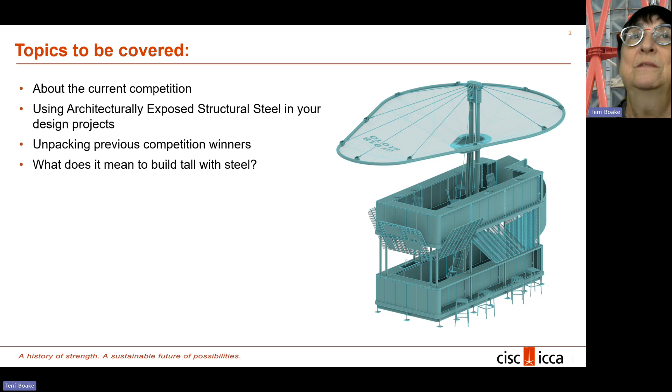The topics we'll look at today: a little bit about the current competition, using architecturally exposed structural steel in these design projects, unpacking some previous competition winners to find out how they did it and what their approach was, and lastly, what it means to build tall with steel.

The current competition is called Ascent. What we are asking you to do is apply steel to the design of an experiential project that investigates ascending—rather open, intentionally. It's to be located in Canada, at the discretion of the specific teams.

Our first prize is $8,000, with a faculty sponsor receiving $2,000. Second prize, $4,000, faculty sponsor receiving $1,000. Third prize, $2,000, faculty sponsor receiving $500. The winnings are divided amongst the team members. Submission deadline is May 16th, 2025. Full information is available on our website.

Eligibility and jury: eligibility is open to students in schools of architecture and architectural engineering across Canada in degree programs. The jury includes people from all parts of the industry—architects, engineers, fabricators, and educators. They know steel, and have been selected because of their passion and interest in steel, specifically looking at exposed structural steel. So you need to show them that you know steel too, that you're adept at designing and pushing the limits with it, and maybe even love it a little bit. Be sure not to include your names on the panels or you will be disqualified.

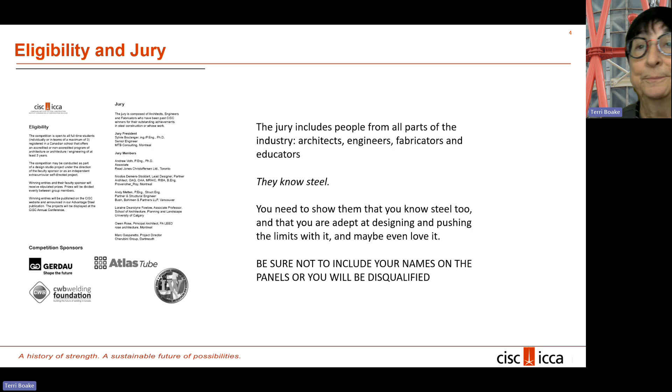A little bit about architecturally exposed structural steel. This is a steel competition, and the steel will predominantly be expected to be featured, therefore exposed. Please review the presentations on the competition website for a full explanation of the CISC AESS specification method, so you can note it on your presentation boards and use it to influence your designs. The jury will want to see clear connection detailing, bolts or welds, member types, etc. Looking at these presentations will really help you understand how to apply steel to your projects.

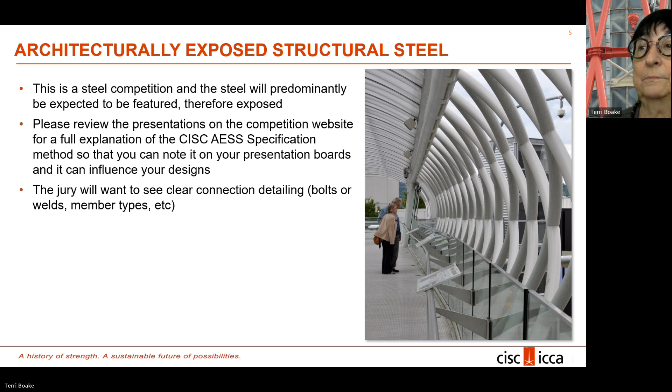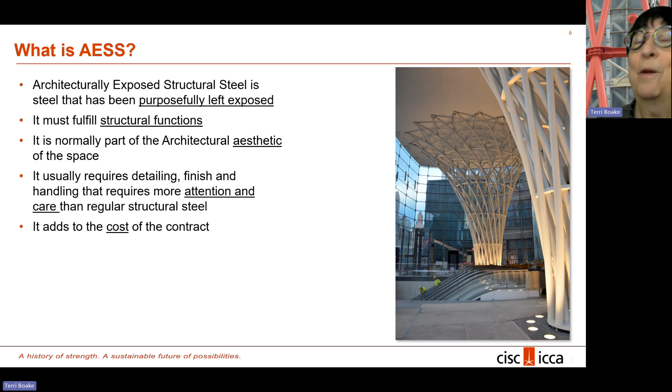So what is AESS? Architecturally exposed structural steel is steel that has been purposefully left exposed. It has to fulfill structural functions, and is normally part of the architectural aesthetic of the space because it's exposed. It usually requires detailing, finish, and handling that requires more attention and care than regular structural steel, and it will add to the cost of the contract. Thankfully, for your competition, we are not asking you to provide a budget.

What are the primary factors of influence for AESS used to describe and define the CISC specifications? We're very concerned about distance and visibility, because the closer the steel is to you, the more you can see and understand the finishes and details you've described. It'll depend whether connections are mostly bolted or welded, left to your discretion—both can be done equally strong. Tolerances required at fabrication and erection are a lot tighter than regular structural steel, and access has to be there to perform the required finish and details.

A big thing for you would be looking at the degree of expression—that has to do with the size and shape of the structural elements, which are choice-wise completely up to you. In a professional situation, we have to be concerned with the interior or exterior setting, because that affects your paint finish, corrosion resistance, and fire protection.

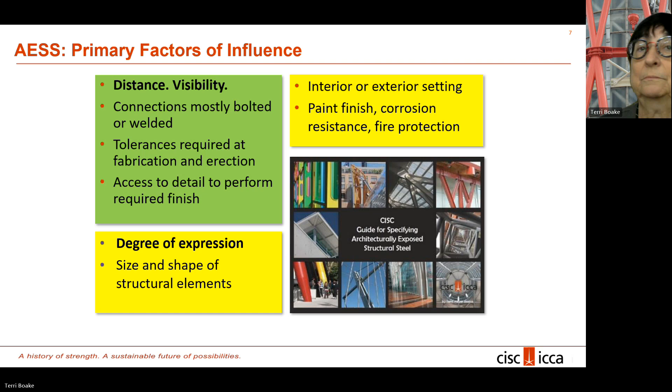So the core idea is form, fit, and finish. One reason we created the specification was to differentiate detailing approaches—like with two trees, as you can see in this image. They're both architecturally exposed structural steel, but each is quite different from the other. So why would the AESS specification be even remotely the same? The sense of these images is to suggest that even when we describe a requirement or title for the competition, there can be many different approaches to arriving at a solution.

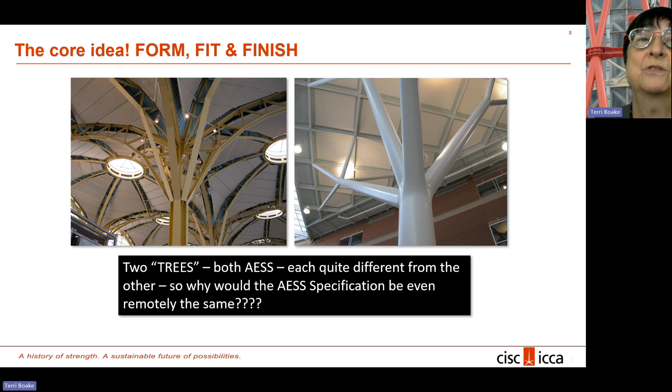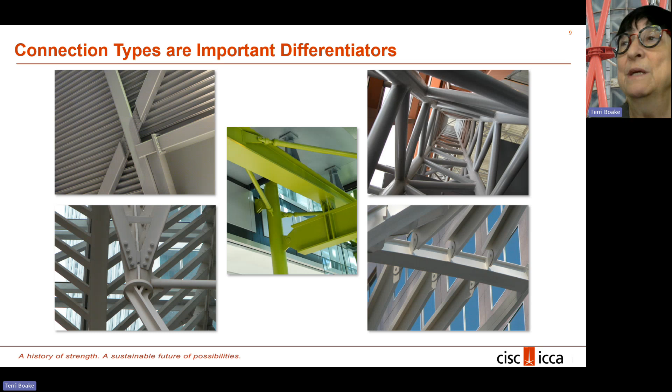So the connection types are really important differentiators. Here you can see a choice of bolted connections, pin connections, welded connections, each structurally doing whatever it needs to do, but they give you quite a different aesthetic. And so when we're looking at the competitions, we need you to get into really specifically the nuts and bolts of how your project goes together to show that you have a really good understanding of that and that you can begin to explore and exploit it.

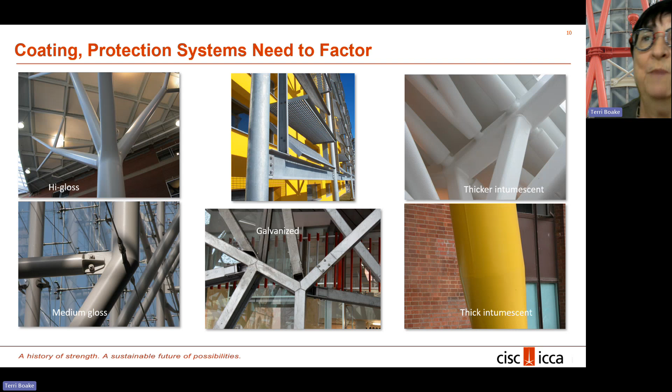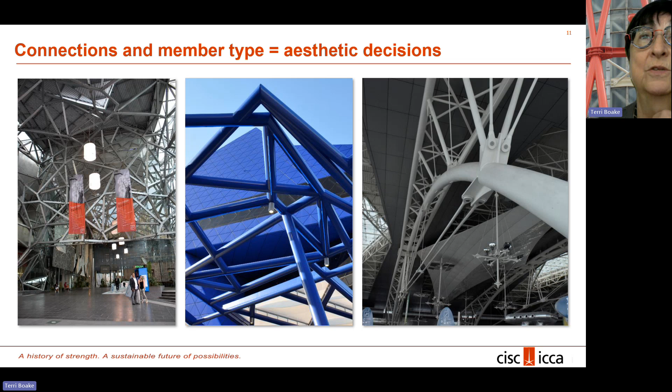So the connections and member types then equal aesthetic decisions, and this is a motivated project in terms of the design competition. Your choice of members and details is going to feed very directly into the final resolution of your projects. So these aesthetic decisions become project drivers. Here you can see three completely different projects taking different approaches to the choice of members, the shape, the connection detailing, and the use of light.

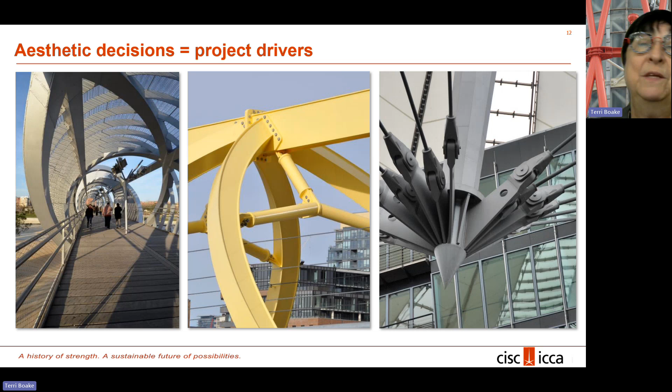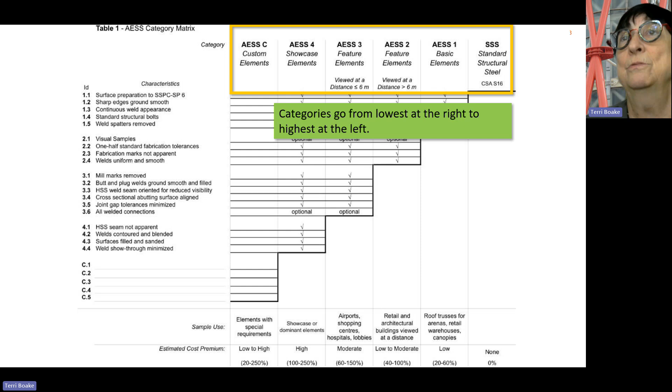So to dip quickly into the CISC AESS method, again, a lot more information is on the competition website for you to look through. We've divided it into basically four primary classifications of AESS. We start with standard structural steel on the right, which is steel that goes to CSA S16 for its specification. And then we ramp up to basic elements, feature elements closer, showcase elements, and then custom fabrication. So we use this matrix in order to describe the relationships between the categories and the characteristics.

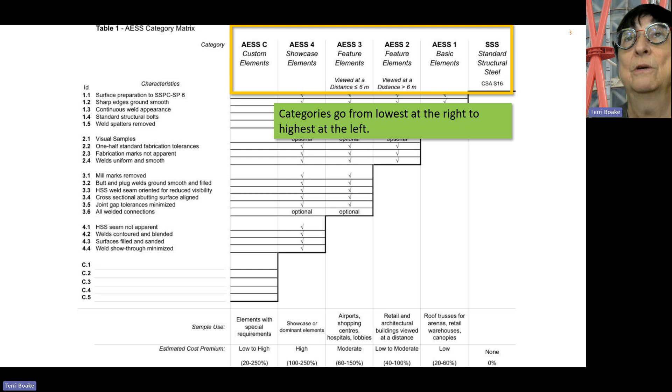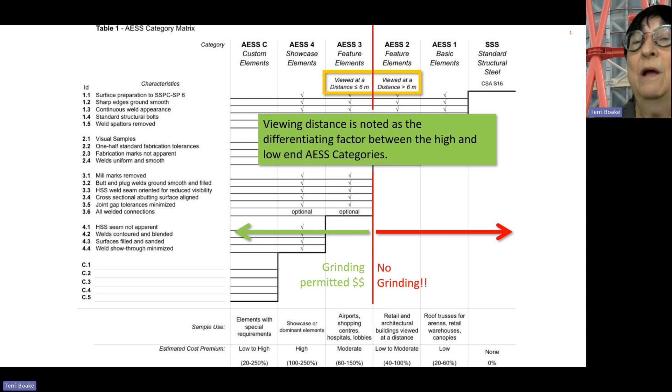One of the things that was a motivating factor when we defined and created the specification system was trying to prevent unnecessary grinding on the project for welds that would be taken away and smoothed out. So we realized that if you were looking at something at a distance, that you could perhaps just leave the welds alone, do them nicely. If you're looking at feature elements up close, then maybe you want to grind those welds, but not even all the time. So down the left-hand side, we have characteristics. As you go through the entire requirements on the competition website, you can see how these are ramped up and cumulative from AESS 1 down through AESS 4.

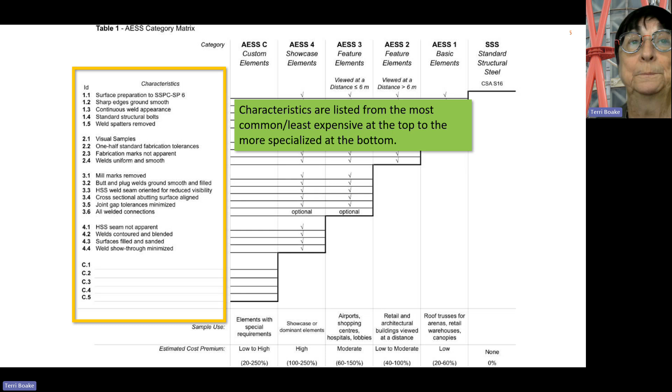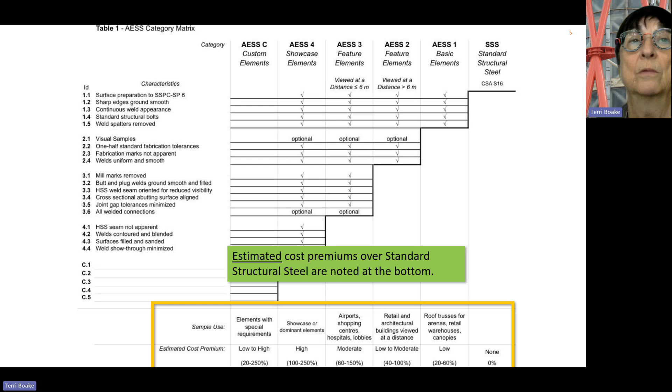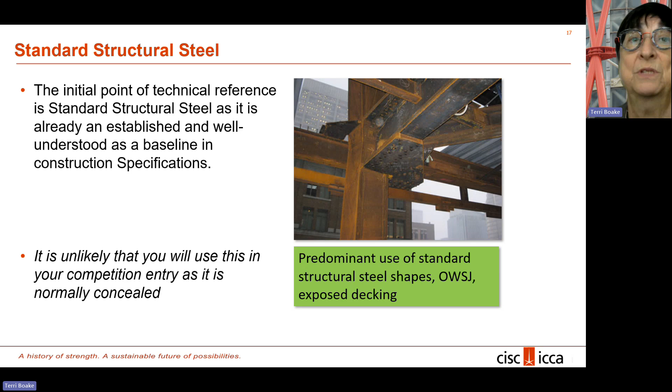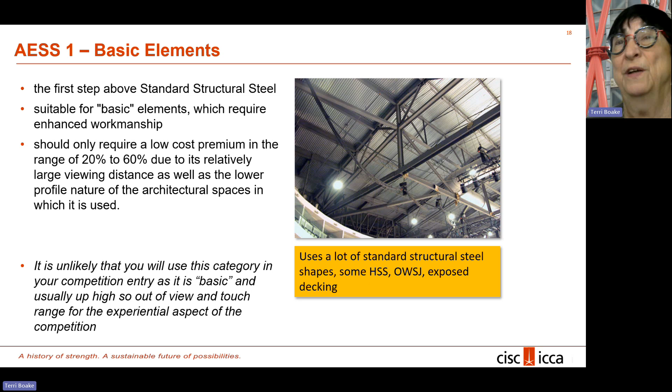And the fabricators provided us with estimated cost premiums, which of course increase as the detailing and the finishes become more particular. So we start with standard structural steel, which is our initial point of technical reference. It is unlikely that you will use this in your competition entry, as this kind of structural steel is normally concealed. The first category would be basic elements, the first step above. You might find this in a big box store, something that would be on the ceiling of, say, a recreational facility. It's also unlikely that you would be using this category because it's fairly basic and just sort of cleanly done - AESS 1, basic elements.

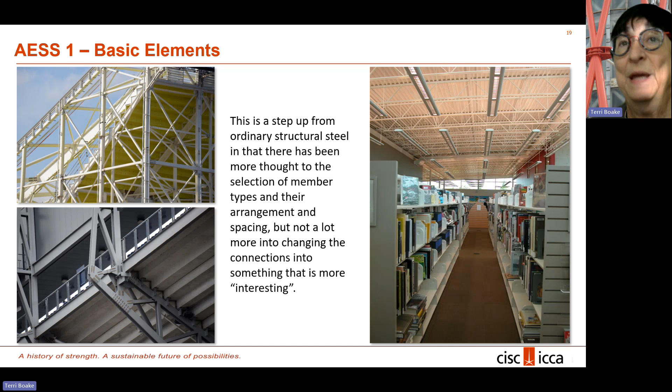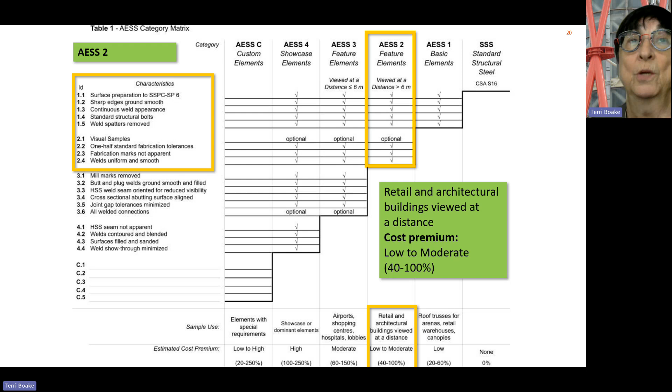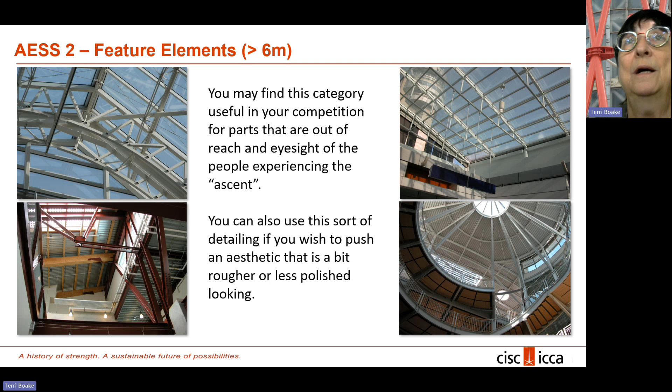Here again, you can see a step above, regular structural steel. It's a little bit better spaced, and it's quite functional in many applications. AESS 2, we start to look at feature elements that are at a distance of greater than 6 meters, and so we're going to be using the first two sets of characteristics associated at the left. Here we can see that a lot of this would be used on skylight framing, roof framing, materials that are quite nicely exposed, sometimes supported glass. You might find this category somewhat useful for your projects for materials that are located at a distance.

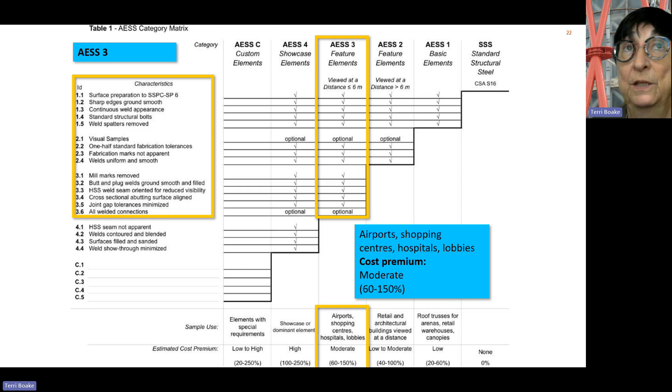AESS 3, which is feature elements viewed at a distance closer than 6 meters, is likely to comprise an awful lot of what you will be using on your projects, because everything that you would be viewing as you would be climbing or ascending your structure would be viewable close up. It includes all three sets of characteristics that you can see on the left. Very often we find it traditionally used in places like airports, shopping centers, museums. You might find some curved steel here. It allows for weld grinding to clean up the aesthetics of the connections.

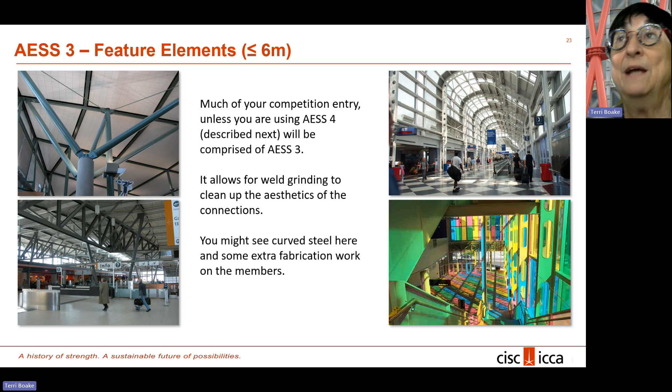And then the top category would be AESS 4, which would be showcase or dominant elements. This includes the complete set of characteristics at the left.

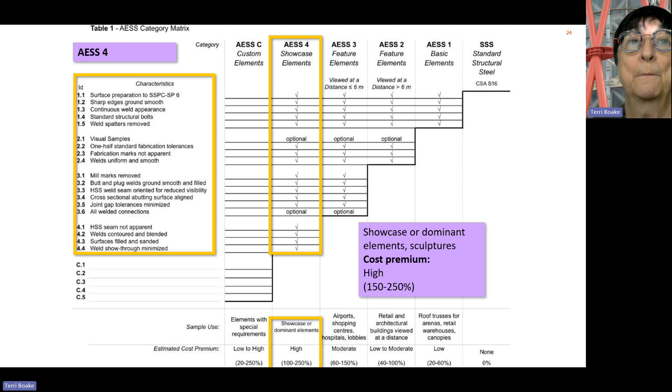And it's very special. It signifies something very special is happening with the steel. It's not to be used indiscriminately by architects if they're unsure about requirements and want to be safe. It will incur significant cost premiums.

And if you want to create custom elements, this is useful in your competition entries, because we're using materials like plate steel. We're making things from scratch. We're not using standard structural elements. Also note, if you're using stainless steel and weathering steel, they also fall into this category because they have very different physical properties due to their chemical content.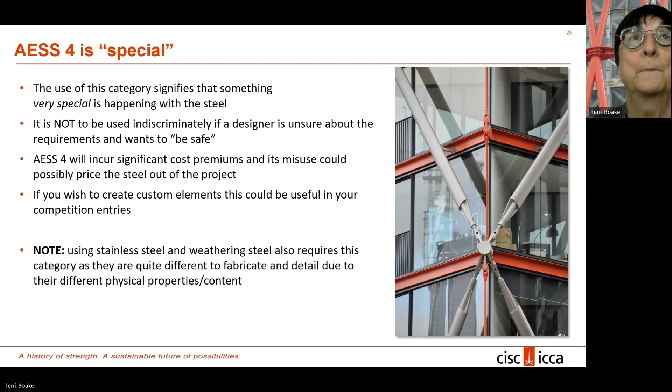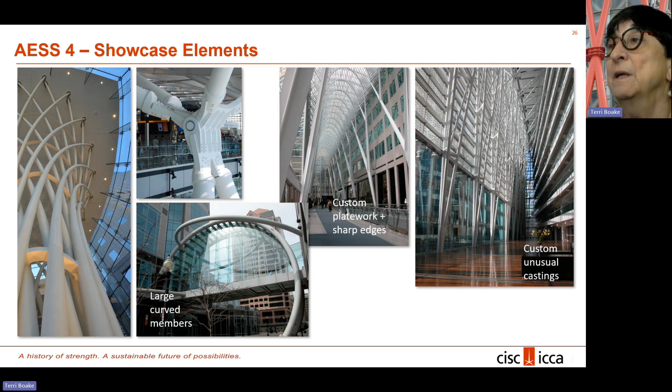So again, here's some examples of showcase elements in buildings where AESS 4 has been used. Again, you can see curved members made out of plate steel, and members that use large custom castings. All of these would be quite applicable to anything you would be pursuing in terms of your competition entries.

So how do we create a winning set of boards? All of the following projects that I'll show you have received an award of excellence in the past 10 years in the competition. The entrants range from year 1 in an undergraduate architecture program through to Master of Architecture students.

So the year or level you are at your university or in your program doesn't necessarily impact how well you can do in the competition. It depends on your intentions and the way that you work your projects through and present them. These projects included herein were undertaken independent of a design studio.

So you do not necessarily have to do this project in conjunction with a design studio. All of these were final projects for half-credit technical courses, but it is quite possible to undertake the project on your own, independently, with or without a faculty sponsor.

These works were largely done independently, though, and without formal critiques from the faculty advisors, but this will vary by institution and advisor. Some advisors have more availability to give you critiques and criticisms. You're also encouraged to go to a local architect, engineer, or fabricator to receive some feedback on your project as it's in progress.

But these all use a complete range of drawings and include very credible and very well articulated details.

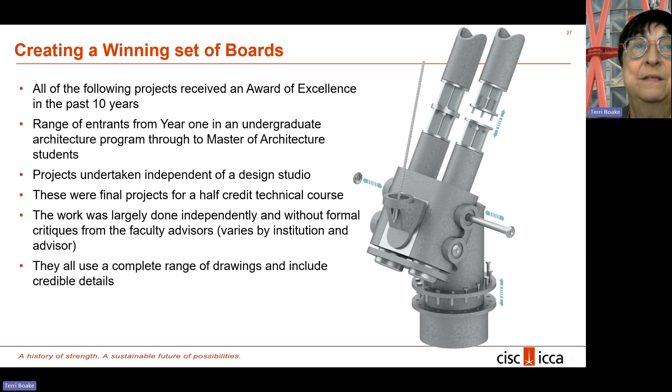The review of the boards happens in an online environment, so be sure that everything you include is very clear and able to be read on a screen. We highly recommend using a landscape format because the jurors are using computer screens, which are typically horizontally oriented, and so it saves them a lot of zooming in and out, and it also makes the boards appear more in keeping with the viewing mechanism.

So on this particular board, again, it won an award of excellence. I would say that the text at the top is a bit small, and on a first pass, it's very important that your first board makes a good impression on the juror and pulls them in to look at it a little bit more closely.

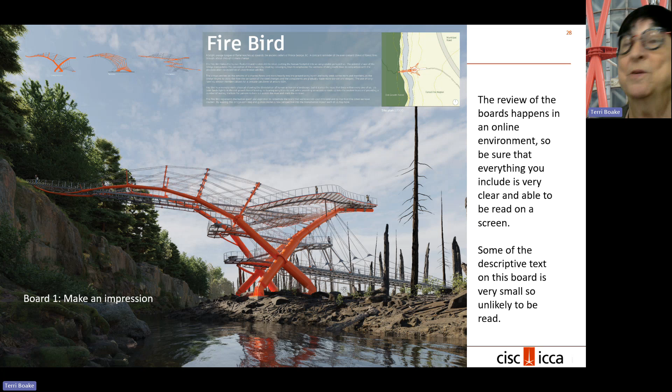Again, the requirement is a maximum number of boards of 3, and I find that most of the people who enter the competition use 3 boards. So on the second and third board, you need to complete the picture. If the first board is the money shot and the one that draws the jury in, the next two boards have to completely explain the project.

So your plans, your sections, your elevations, your renders, and details. And you'll find that most of the winning projects will take an axonometric of the project and pull it apart to show where all the detailed connections come through.

This board is also showing, on the bottom of the right-hand side, all of the different materials they're using, as well as looking at the AESS categories. So those are clearly explained as well on the board.

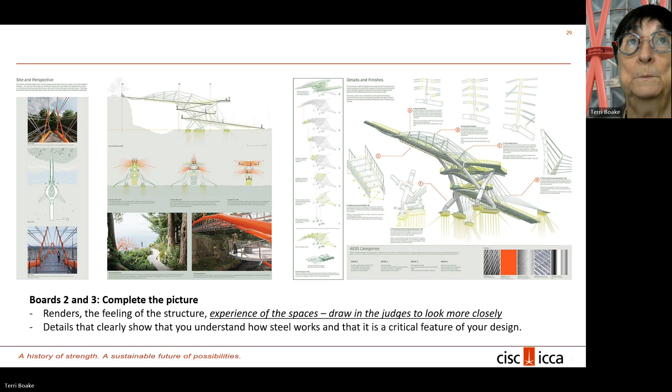This next project, called Market on Ice, was done actually by a team of first-year students. So what can you add that maximizes the impact or versatility of the design?

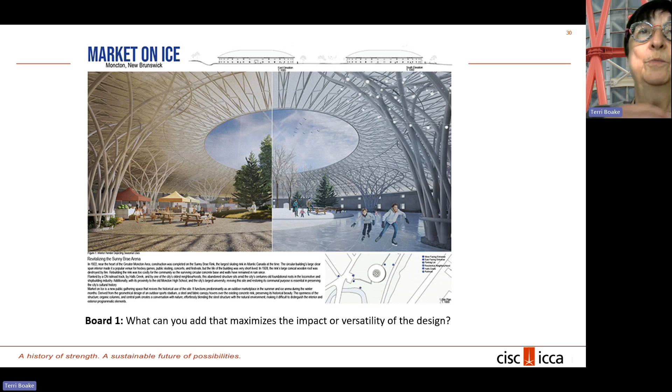Everyone is doing the same competition, but all of the entries look quite different. And so it's your take on the theme and how you want to describe that, or sometimes expand upon it, because you need to have some sort of an edge on other entrants in order to make your project stand out. So on this particular board, they've looked at the canopy project in terms of the idea that it could be used in the summertime for one purpose and in the wintertime for another.

Again, on boards 2 and 3, they're making a coherent set, including details and renders, and I think that these boards are really nicely balanced in order to give a complete view, a complete understanding, as well as making a very compelling presentation. You need to annotate sufficiently to explain the use of the steel.

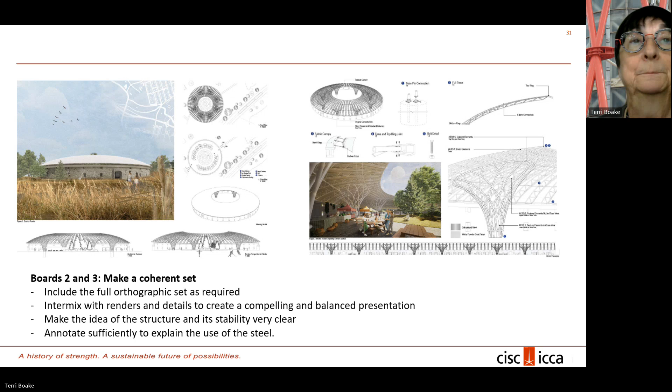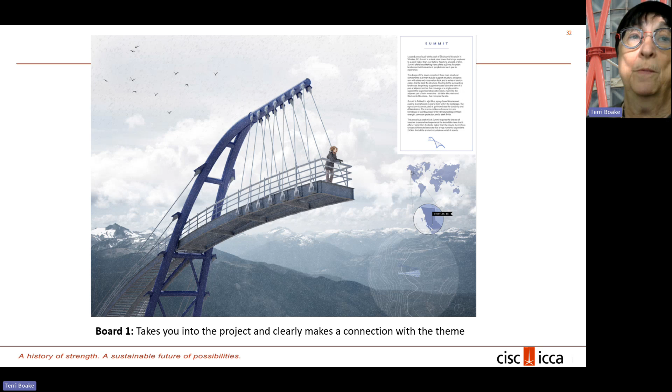This board takes you into the project and clearly makes a connection with the theme. It's really one shot, but also includes on the side its location and site plan. The site plan is quite small because in a project like this, it's the detailing and understanding of the three-dimensionality of the materials that's probably more important than the siting issues.

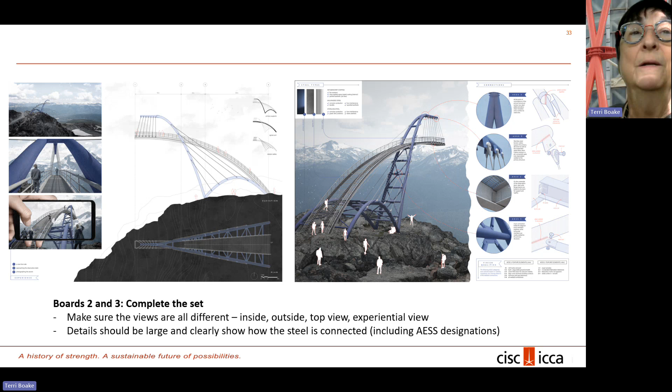On the right-hand side, you can see clear detailing for all of the connection details, as well as descriptions of the AESS categories. This particular project did a value add - what did they want to add special to the program so that your project will be set apart and above the other entries?

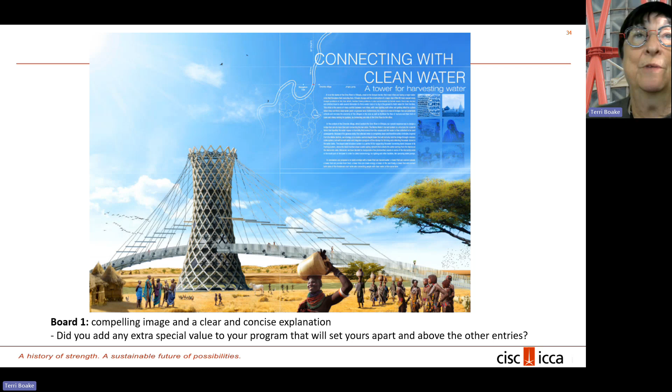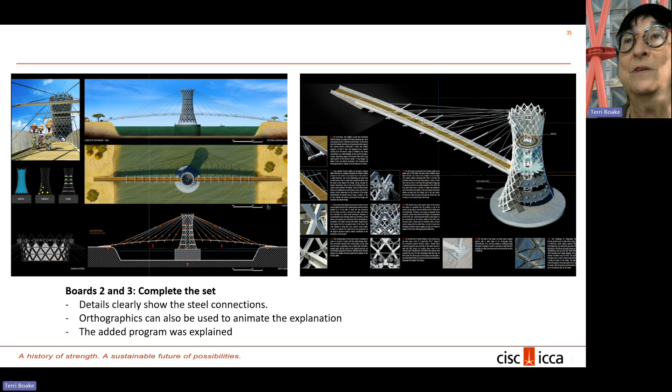This set looked at water collection for Africa. They designed a tower project with a bridge going across that had a water collection mechanism that would take the night dew and create water collection to help the locals. In addition to giving us a clear set of details and drawings showing all of the required orthographic views to make it understandable, they also went into quite a bit of work to understand the water collection system and explain that on the right-hand board.

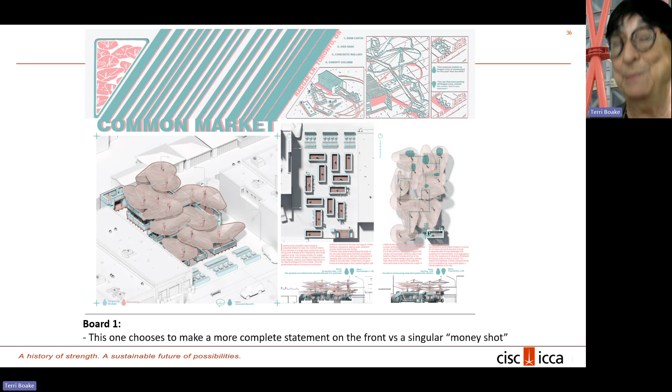This particular board, which was for a market, chose to make a more complete statement on the front versus a single money shot. The team spent an awful lot of time looking at making this into not only a market that would be a pop-up, but also a pop-down market. So they looked at design for disassembly.

A lot of the space on the second and third board, particularly in the left-hand exploded axonometric, shows how the entire set of stands for the pop-up market would go together and come apart. The details on the right-hand board are extremely well crafted and show particularly how everything is going to go together as well as come apart. I think one of the reasons that pushed this project to the top was the extra effort they made to fully understand the mounting and demounting of the project.

Part of what we get into in detailing is showing that you have an understanding of how steel projects are put together. Again, the views were very experiential, so you could really feel what the space was like to inhabit.

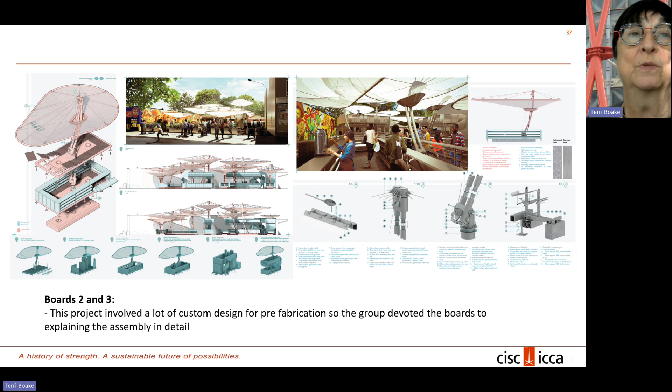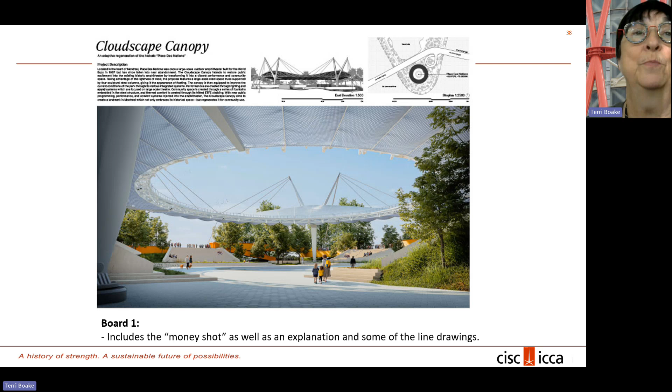This particular canopy on the front page includes your money shot, as well as some explanation and some of the line drawings. So that's board 1, and then boards 2 and 3.

One of the things that a lot of students like to do is show daytime shots and nighttime shots to give you more of the idea of the experience. This was a performance space, and obviously a lot of performances would also happen at nighttime. So they were quite careful to show how the entire assemblage went together, as well as how it would feel when a performance was happening. You can see there's quite a lot of density and information in these boards.

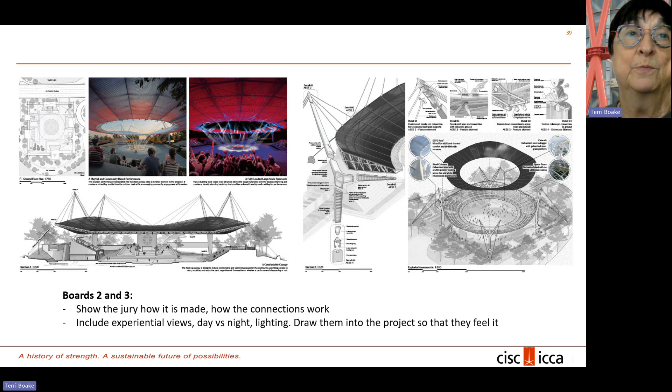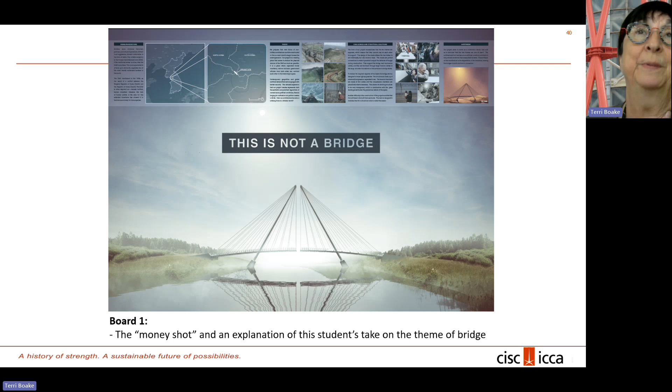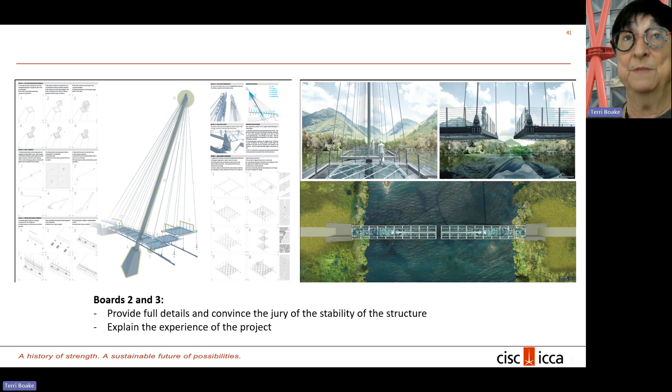This particular one was a bridge project, actually supposed to be at the border of North and South Korea, so it was more of a political statement by the student that this is not a bridge. It looks like a bridge, but when we look at the detailing, there's this separation between the two ends of the bridge. On the left-hand board, an axonometric shows clearly how everything goes together, differentiating between the tensile support system and the more compressive systems and spanning systems necessary to make this work.

So what about our competition theme, ascent? The noun, or the word ascent, actually is a climb or a walk to the summit of a mountain or hill, from the dictionary. So our theme this year is an experiential action and not necessarily a building type. It infers a destination, maybe with a view, and it's intentionally pretty open.

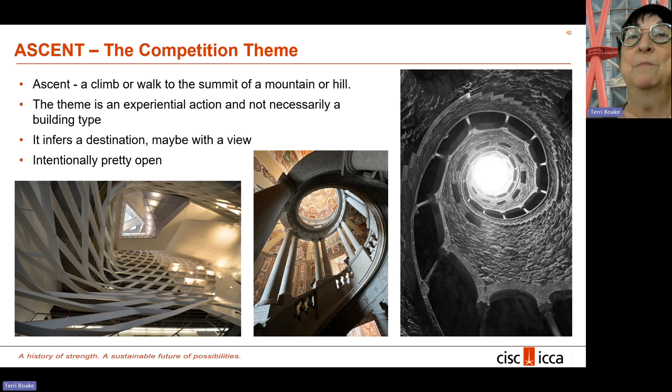The photo that we selected for the poster on the right-hand side here is a spiraling staircase that goes up to the sky. Some other ways we could look at that would be a more classical building in the middle, or a more contemporary staircase system on the left. But the idea is that this is not an interior, but a freestanding building structure that you are charged with designing. And the idea about ascent is that it's experiential.

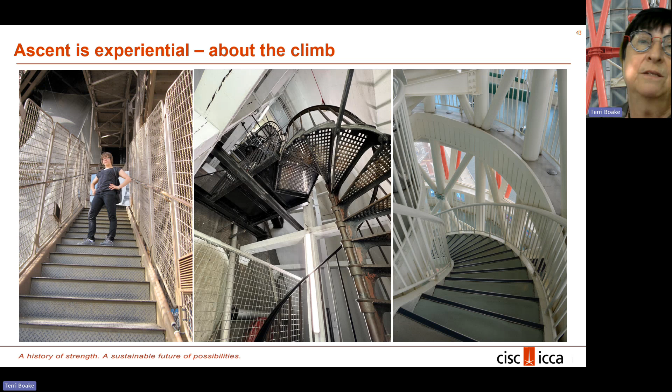It's about the climb. So everything that I've said to you about the previous boards comes through in terms of how do we make this a means? How do we get to the top? What is it like to get to the top? How are we using steel in order to make that happen?

But the ascent must be inclusive. Experiences are not just for the able-bodied. So you must provide an alternate and equally interesting means of ascent that can be accommodating for the mobility challenged. That would include people on wheelchairs, strollers, or scooters.

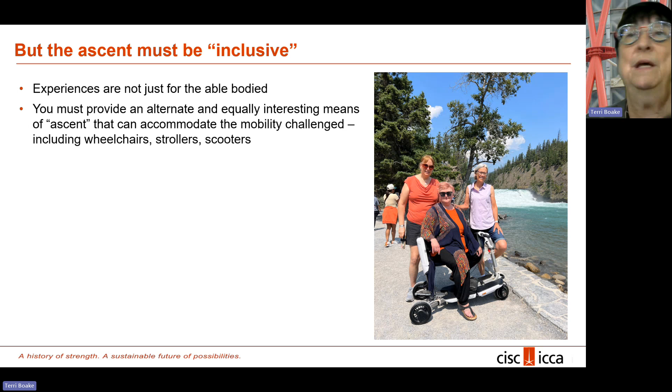This is really important to understand because a lot of buildings may also provide elevator access to the top, but it's an enclosed elevator, and it's really not the most exhilarating experience one can have. So that asks you to look a bit at vertical transportation methods.

The picture on the left is a view up the elevator shaft of a tower in Fukuoka, Japan. On the right is the view looking from that glass elevator out through the structure of the tower to the exterior. As far as an engaging experience, it was a pretty engaging elevator ride that was actually the only way up this tower. We weren't allowed to climb up the stairs.

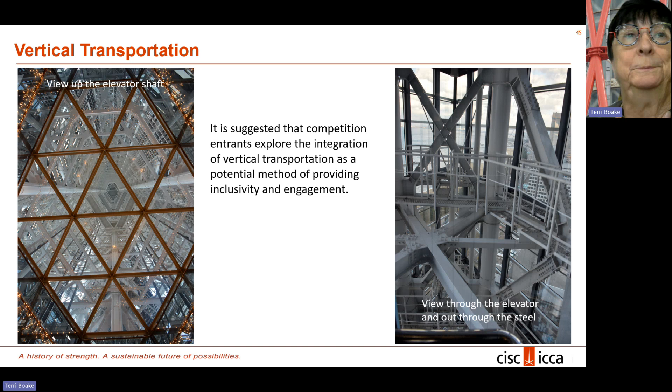So we want to experience the steel itself, from the inside of the building as we ascend, and from the outside of the building as we look at it.

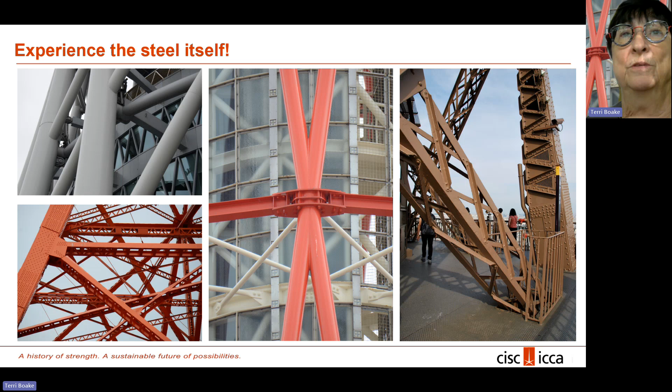If we look at the way towers have been done in the past, and buildings that expose steel to height, we can see some of the older towers use more lattice structures. On the right-hand side in brown is the Eiffel Tower, probably one of the earliest steel towers. On the left are some examples from Japan, showing the use of lattices on older towers and tubular steel on some more contemporary projects.

Stability: we can go for traditional stability. So there's me with my family in front of the Sapporo TV Tower, one of many towers constructed in Japan, mostly of the same A-framed model, which is loosely based on ideas put together by Shukhov in Russia in the early 1900s with his towers.

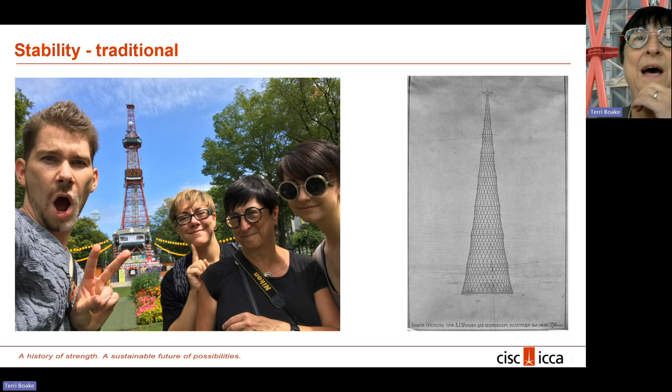We can look at that as the model for stability, or we can look at more challenging and perhaps more exciting modes of going to height, creating an ascent that may deal with eccentric loading. The one on the left is the Capital Gate office building in Abu Dhabi, which has an 18-degree backwards lean. It has to have a lot of counterbalances in the core to tension it and balance so it doesn't fall over.

The middle one is the Orbit Tower, done for the London 2012 Olympics, made out of prefabricated steel pieces that twist around, with an interesting spiraling climb and staircase to take you to the top.

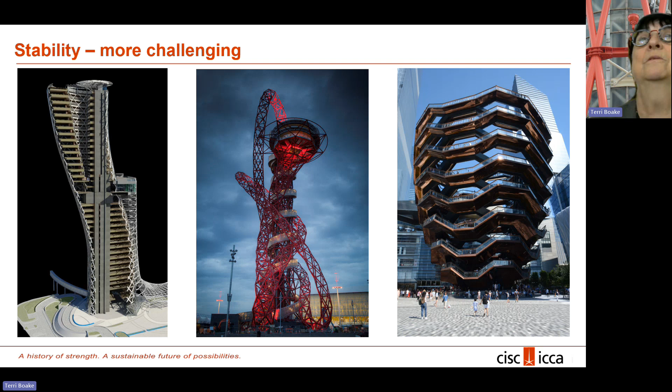On the right is Heatherwick Studios' Vessel in New York City, which has stairs to permit climbing to the top, although the ascent for people who may not use the stairs is really an enclosed elevator off to one side, so not quite as exciting an experience.

So ultimately, the ascent is really maybe about the view. What do you do at the top? How do you engage with the landscape? How do you look through the steel? How do you look over the steel?

Again, the site and location can be selected by the team themselves. We're leaving that quite open.